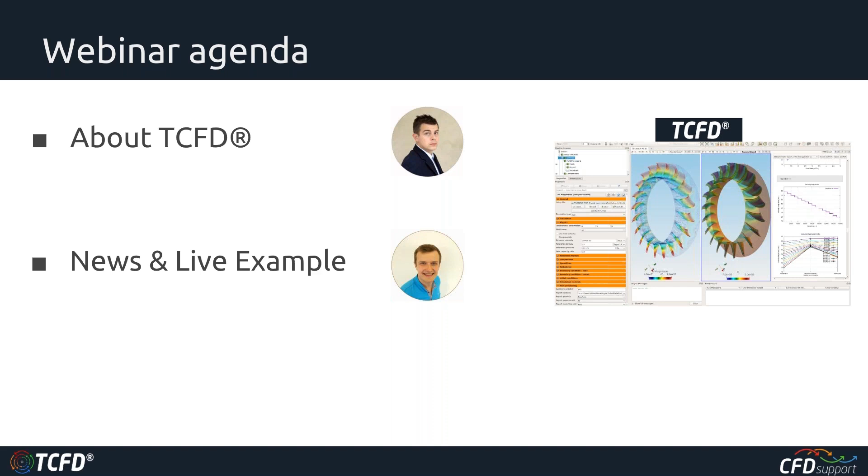Okay, so this is the webinar agenda. The webinar is going to take about 1 hour. There will be 3 parts. In the first part, there will be a general introduction, which is this one, where I'm going to point out the main TCFD features and capabilities. In the second part, Radek is going to give you a live TCFD experience, presenting it on a fan simulation workflow. Finally, in the last part, there will be a Q&A session dedicated to your questions and our answers.

TCFD is a unique CFD software because it's unlimited, which means our clients can keep TCFD forever. They can use it for an unlimited number of users, jobs, or cores. This gives the investment in TCFD a permanent value, and also means our clients can scale their CFD simulations in a really, really big way.

TCFD is focused on particular workflows. For example, a fan engineer uses fan inputs, fan names, fan units, and fan results, as you can see later in this webinar.

TCFD is automated, so for this reason, the TCFD workflow is extremely effective, and also the automation reduces the chance of human error, which is also very important.

TCFD has very good technical support. We keep a custom approach to every customer, to every issue. We never leave behind any of our clients. We are flexible, and we support our clients even in matters outside the CFD field, for example in numerical mathematics, physics, IT, or even software engineering.

Real tutorials are available. Currently there are 22 tutorials that are based on real machines and real projects we solved in the past, so the new TCFD user has no doubts about how to start and even what the best practice settings are.

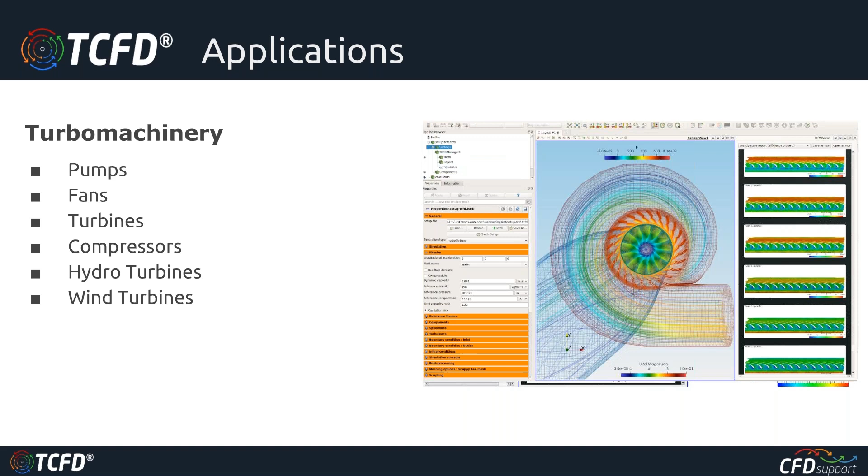TCFD is always focused on particular workflows by particular applications. TCFD's core has always been turbo machinery simulations like pumps, fans, turbines, compressors, hydro turbines, or wind turbines, and many other kinds of turbo machinery, both radial and axial machines, both compressible and incompressible fluid flows.

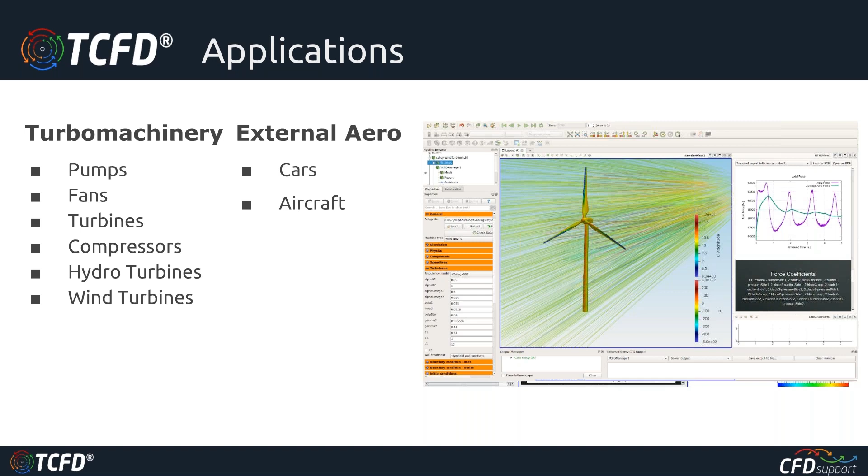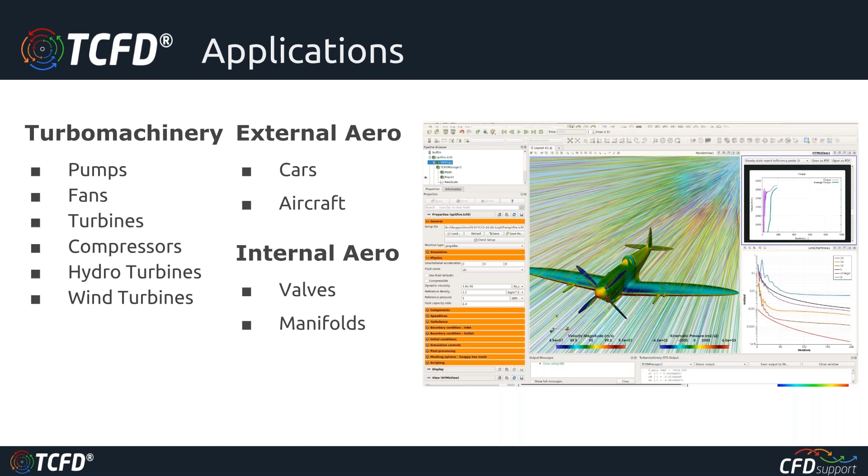Later, we decided to extend what had worked so well in the turbo machinery field to external aerodynamics. So now TCFD is able to simulate cars, aircraft, or other external flow. It can also simulate internal flows like valves, piping systems, manifolds, and many others, or for example ship hydrodynamics.

So the usage of TCFD is very wide now. These are the applications.

There are a few technical details, I will go very quickly over them. TCFD is natively compiled for Windows and for Linux. It's up to the user which workflow is used - they are exactly the same.

100% of the workflow is in the graphical interface. Batch mode is available, so TCFD can be run by another software in the background. TCFD is further scriptable in Python. What's important, the automated meshing system is included, or external meshes can be loaded.

The trial version is available, so anybody can try TCFD, and after trying it, decide whether to go for it or not. It's very transparent for this reason. Real tutorials are included.

TCFD has strong post-processing, with a special reporting system in HTML format. We have also developed a special set of tools for turbo machinery post-processing. There's extensive documentation available - PDF manual, videos, how to work with TCFD. Many of the resources are available online.

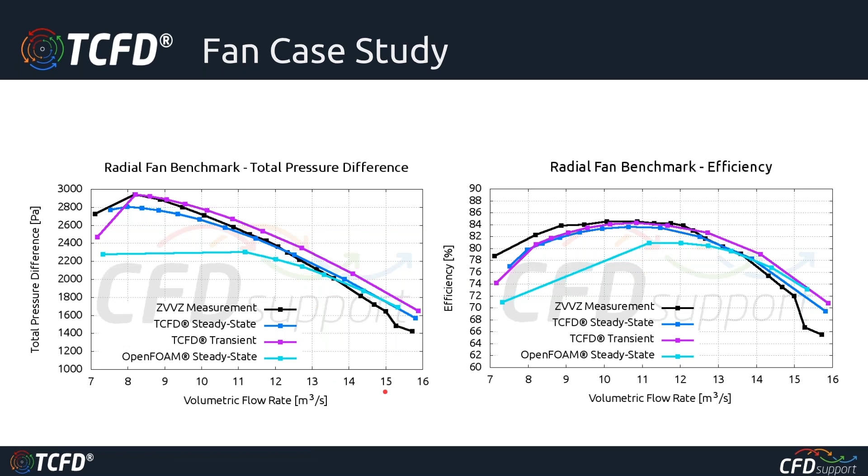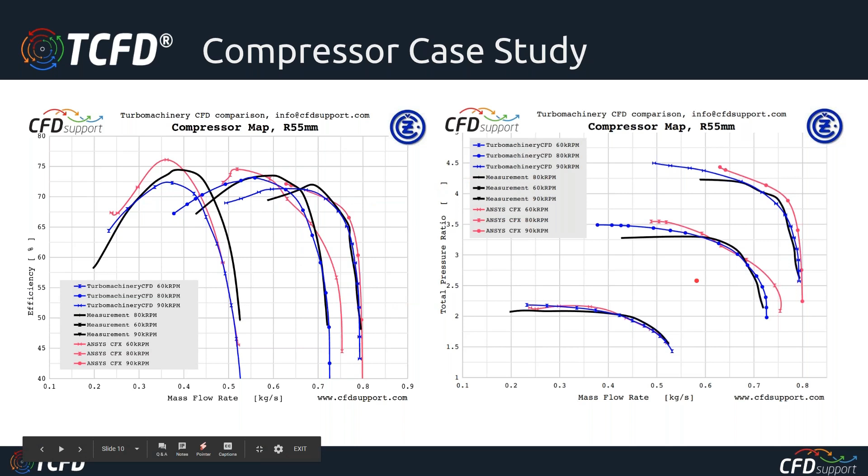In another project we did together with ČZ Strakonice, the project was aimed at compressible flow of a centrifugal compressor. Again, measurement data is available, and we also have one commercial code's results to compare with. Complete centrifugal compressor characteristics were simulated at 3 compressor speeds, and as you can see, the results are also in good agreement.

This one is a detailed study we made on TCFD parallel scaling. As you know, scalability is one of the most important features of any CFD code. In modern CFD, it's critical for any CFD code to show linear speed up with increasing number of simulation cores. Especially for unlimited CFD code like TCFD, scalability is crucial. So we made a detailed study on TCFD parallel scaling.

The tested case was a Francis turbine. The scaling results are amazing - here you can see the key figures. This study clearly proves that TCFD has very high parallel scaling efficiency. And of course, the detailed PDF paper is available for this study, so feel free to ask for it to have a look at the details.

TCFD is being extended by new applications. Recently we made TCFD able to simulate external aerodynamics. We made a complex TCFD study on a Spitfire aircraft, using the CAD model and original measurement data to compare with the simulation results. The agreement with the measurement was excellent.

The detailed paper of the study is available, so feel free to ask for it.

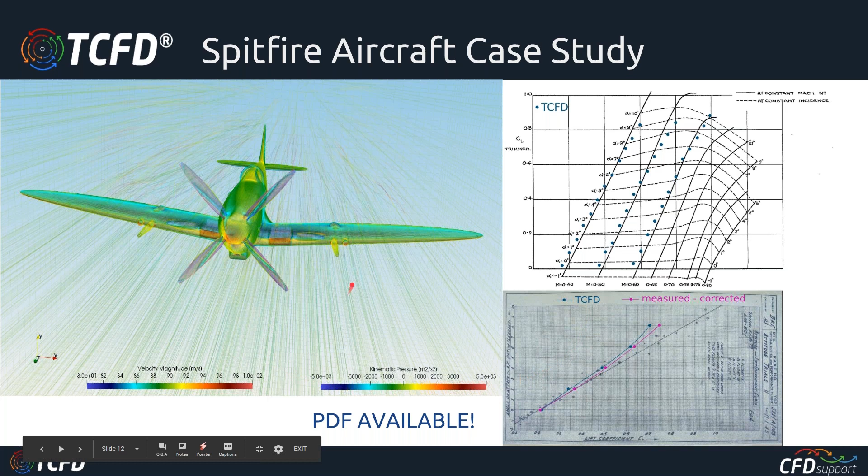In my last example, we have an optimization study. We did this together with our partner, a German company called Friendship Systems, who developed their product called CAESES, a flexible CAD platform for fast and comprehensive design studies combined with simulation tools. Together we made this study on fan optimization.

The optimization study is a cycle of many simulations of many designs. The designs were created in CAESES and simulated in TCFD, and as a result the engineer gets an optimized fan model with higher efficiency. The detailed paper of this study is also available on request.

Okay, I think this is it from my introduction part. Now it's time to hand over the presentation to Radek, and he will give you a live experience of the TCFD workflow.

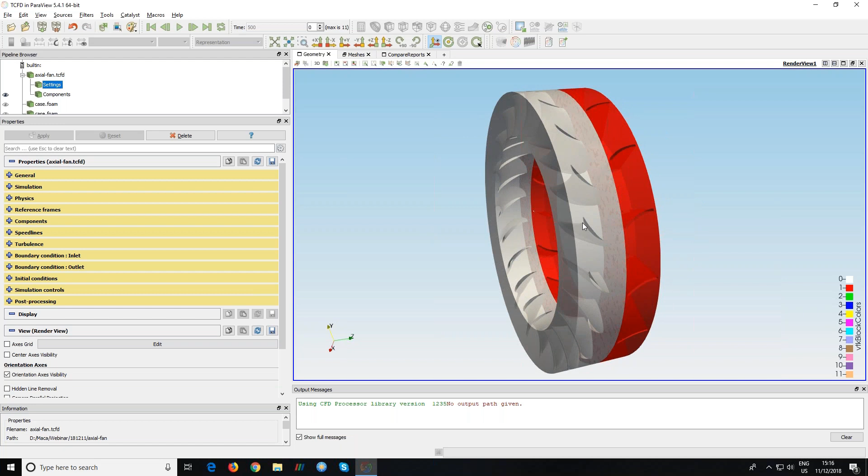Then we will show you the difference in setting up the same case but only with the segment approach, where only one blade segment is simulated. Then I have an example of a radial fan, showing how the setup is done, and some results or comparison studies for this particular geometry.

Last but not least, the latest version, 18.10, of TCFD allows defining several rotors with different axes of rotation and different speeds. I will show you how to set that up as well.

Okay, let's start. All these cases are our tutorial cases, so you can download them and try them yourself. You can ask for the trial version, download the tutorial, for example for this double rotor fan, from the download section, and try it yourself.

So let's start with what we need at the beginning to work with TCFD. For example, I've prepared an axial fan segment live example. At the beginning we need to have the geometry in STL format. Usually we need each component, which is a given part of your geometry—stator, rotor, pipes, and so on—well defined and exported from your CAD software into STL format, which can then be used for the TCFD setup.

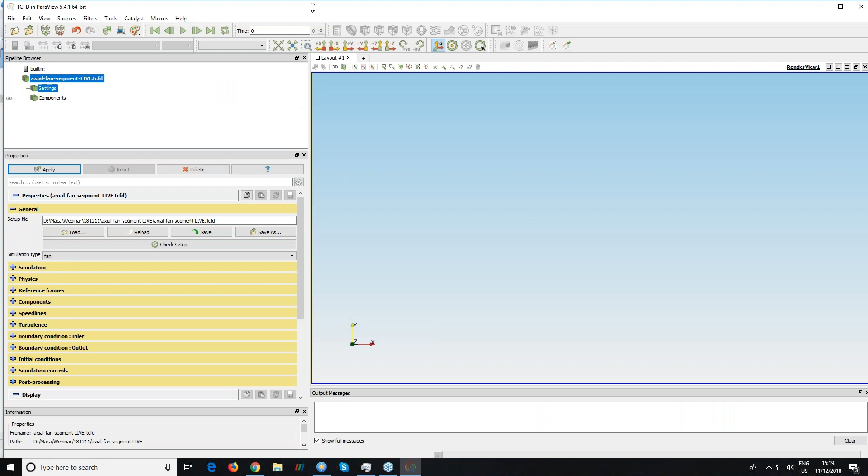What I haven't mentioned: I am in Windows, but the same workflow can be applied also in Linux systems. By clicking on the TCFD file or opening TCFD, you will see this graphical user interface, which is directly implemented into ParaView, a great tool for scientific data visualization. The connection between the setup of the TCFD simulation and the post-processing which ParaView provides is amazing because you can do anything in one place.

Or if you already have the simulation set up and you are, for example, ready for an optimization loop or any other loop, you can go directly to this preset case. You can simply open the command line, and with a simple command, here—I will just follow the TCFD installation—this is the binary, and there is the execution file CFD processor, which works very simply: you just give it the setup file and tell it what's to be done.

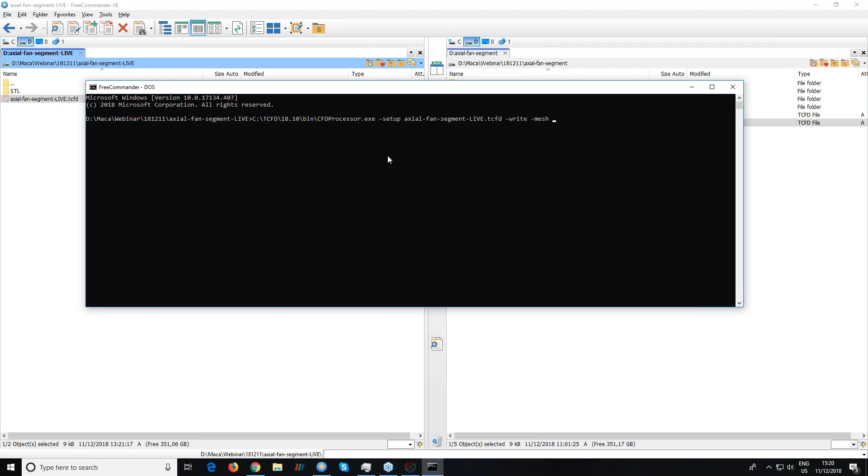For example, I would like to write the case and create a mesh, and additionally I can set where to store my simulation, for example my directory. Just click, just enter—you can put this into your script or scripting loop, and anything can be done without a graphical user interface.

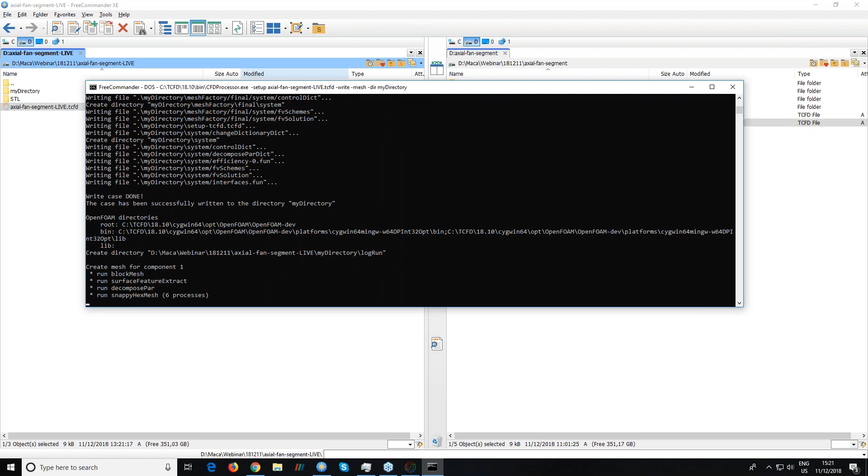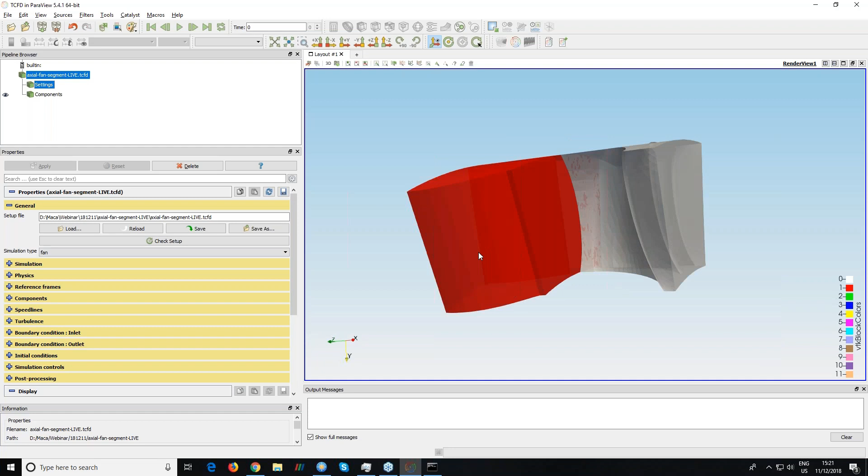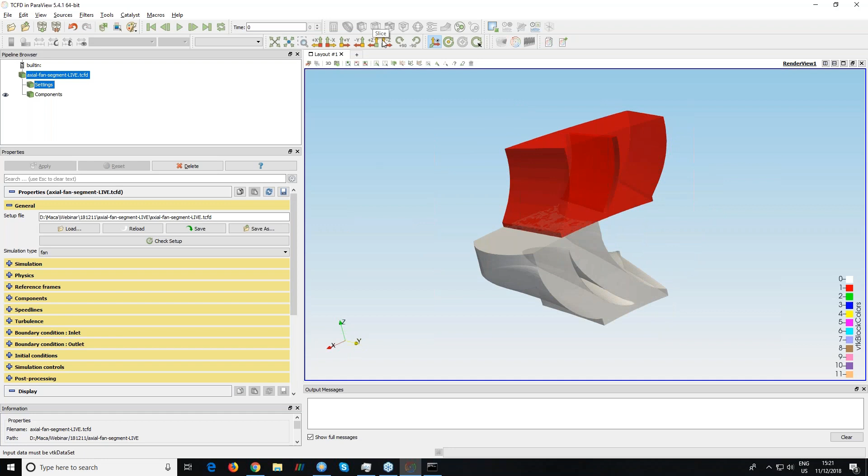Okay, but now because I will be talking about the setup, it is much more clever to use the graphical user interface. So this is how it looks like. Here are the several menus for the TCFD setup. On the right side, we have the render view in which both input geometry, mesh when generated, and also the results can be visualized. Then there are several icons relevant for TCFD setup, and others for viewing options and applications to the geometry, to the results, and so on. I think it is quite intuitive, and it takes just several minutes to learn the interface.

Okay, so let's start with the TCFD setup. Usually you should go step by step over each menu and define the simulation. So in the first menu, simulation type, it is distinguished by different types of turbomachinery or external aero, because each type consists of a particular setup tailored just for that type, as well as the evaluation or post-processing tools, which are also tailored to the particular case, including efficiency evaluation and so on.

So this is here. Inside the simulation, time management, you can go for either steady state or transient simulations. Of course, you can set any number of processors which you have, there are no limitations. Numerical order first and second - the rule of thumb is that with your first case, your first geometry, you should always go for the first numerical order. When everything goes well, then you can switch to second order. It's always problem dependent, so there's no common setup, but usually start first and then go for second.

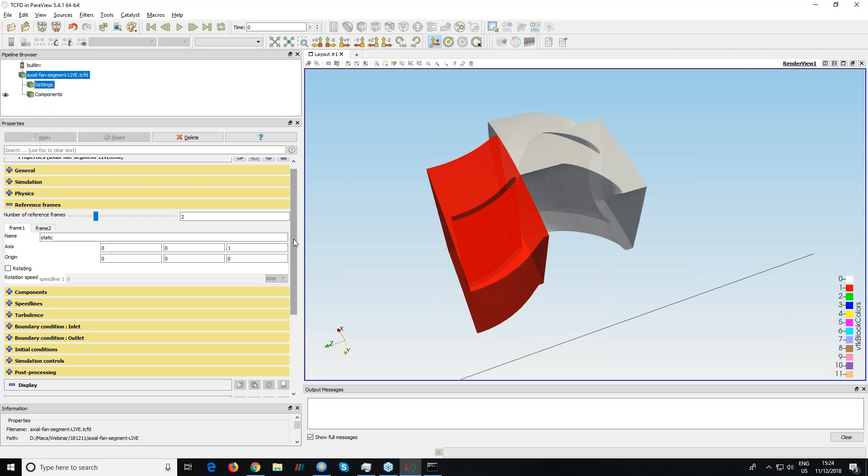Now, what is new in this version is the reference frames framework, which allows us to define several rotors. So for example, in this case, we have just two parts, two segments. I think the flow goes from left to right here. This is the rotor part, and this is the stator part.

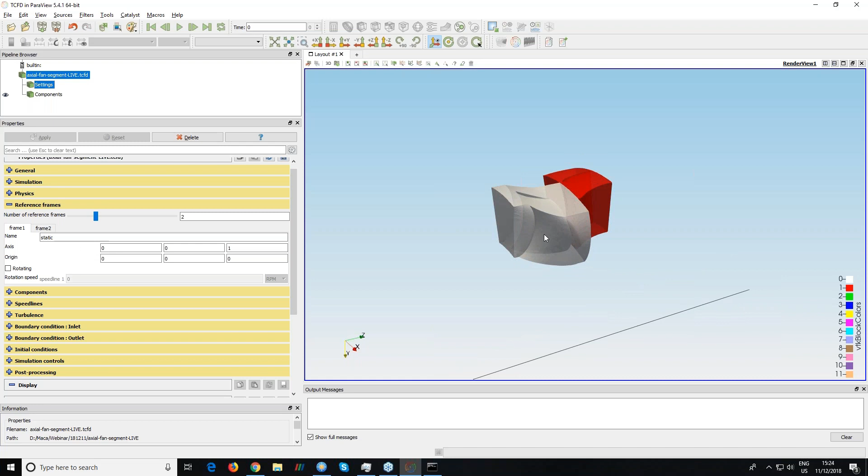So I should define two frames. First one is static, to define the static frame, the stator part. It is not rotating, so no rotation speed is set, but the axis and origin of the rotational motion has to be set, because the solver needs to know the transformation to connect the segment parts, to virtually build a full wheel geometry. And the same for the second frame, which is rotating.

So the name is up to you, you can define any name you want. And if you enable rotating, then you have to set the speed of rotation of your rotor part. If I, for example, move

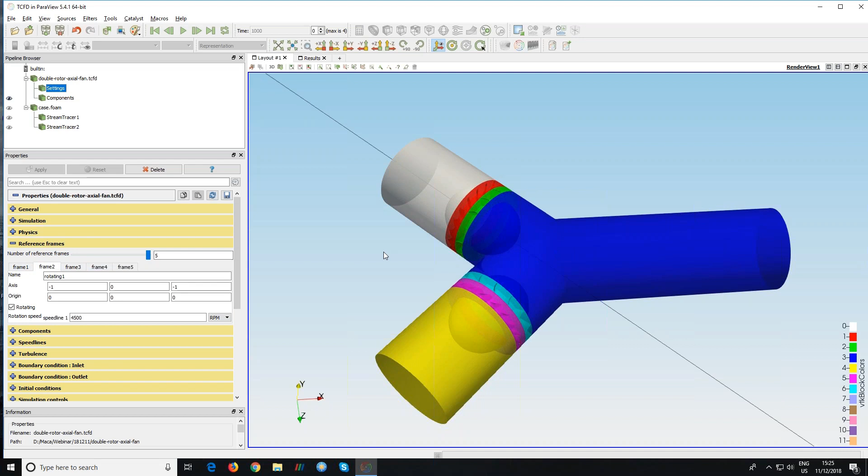to this double rotor fan, then you should define several frames. For example, frame 2 is for rotating this rotor part, and rotating 4, I guess, yes, is for rotating this purple part. You can see also that the axis of rotation is nicely visualized. So if you make some mistake, you will always be informed that something is wrong, which is also a nice feature. Then the rest is almost the same - you define as many reference frames as you need.

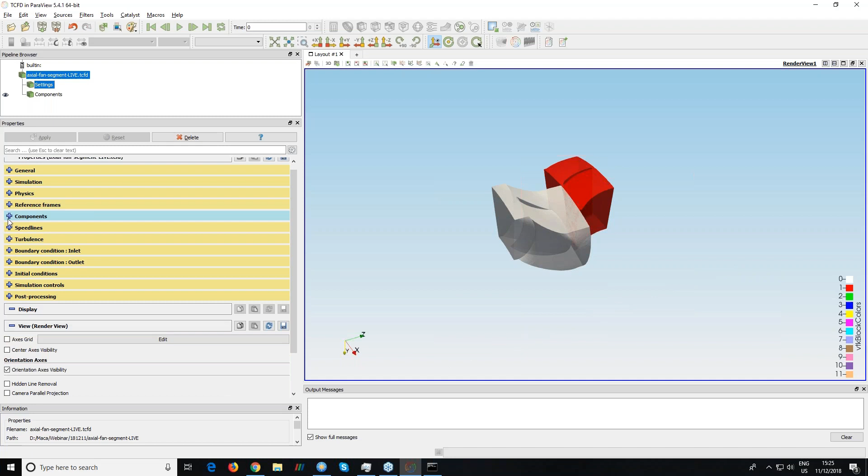Let's go back. And then we can go for the components menu. Basically here you define the mesh, the input geometry, and possibly the mesh for the simulation. There are several options how to create the mesh. First one is to load the STL files, define the refinement, define the fineness of the mesh, and create the mesh by the snappyHexMesh tool, meshing tool. Or you can directly go for external Fluent mesh, and load the external mesh in Fluent format.

So for those who are familiar with some external meshing software, you can go for that. But now I've switched, so I should go back to the directory with STLs. I need to load the case again, because when I switch to the external Fluent mesh, I have erased my setup. So there are two options: STLs or external Fluent mesh.

Then you can define here the component name to be more clear which component it is, so you can then know from the report and any other setup that you are at the impeller or at the stator or any other part.

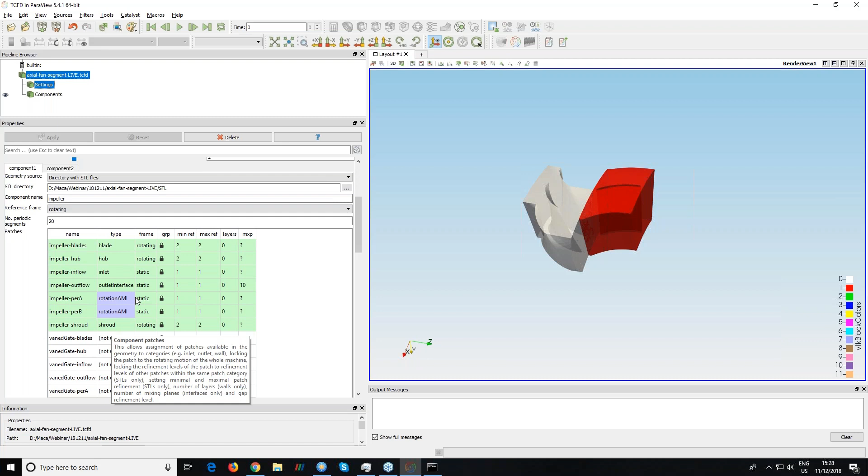For example, if I go for the full wheel and look at the components, you can see there are no connections because we have a full wheel, so there are no periodicities to be connected. As you can see, the other setup is the same.

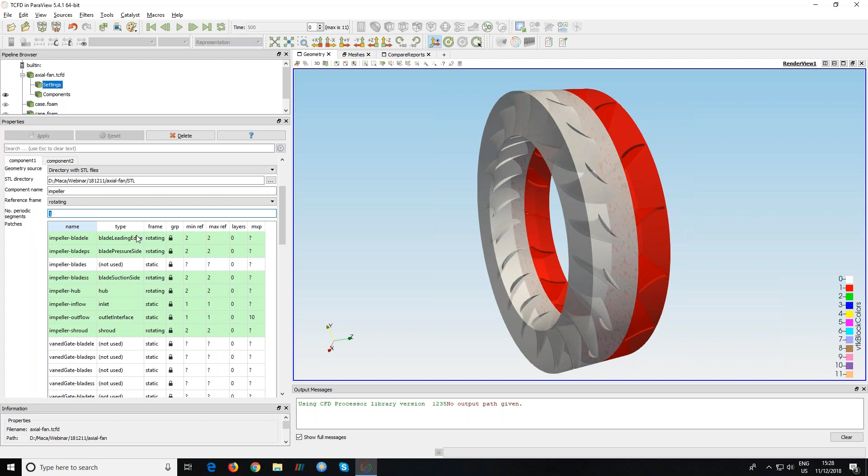What I missed is the number of periodic segments. For the full wheel, we have just one because we have the full wheel geometry. But if we have only one segment, then you should set the number of blades which builds the full wheel. In this case, we have 20 blades on the rotor side.

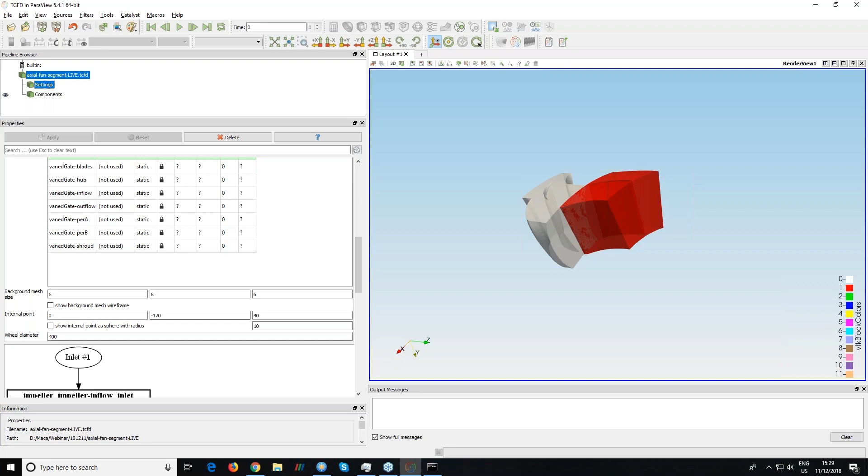Then we should define the refinement of the mesh. First, we have to set the background mesh size, which is basically the largest cell inside your mesh. To see how these cells are sized compared to your input geometry, you can enable 'show background mesh wireframe', and then you can see how rough or how fine it will be.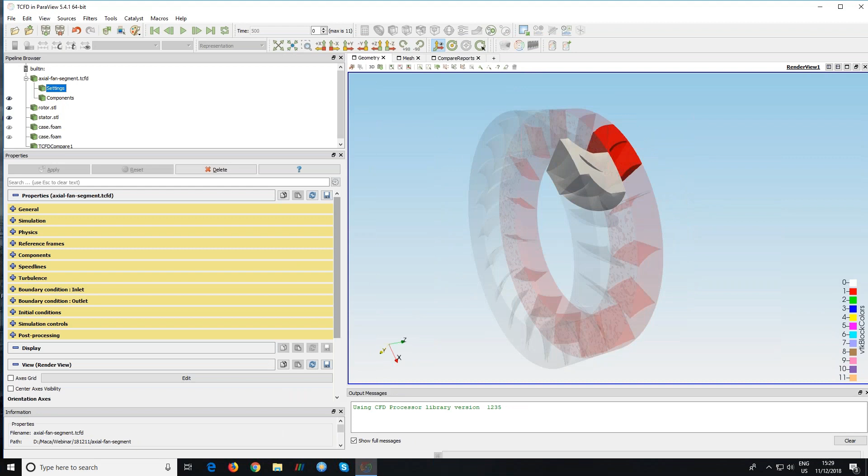This case is set up to be quickly computed, so I set quite a rough mesh. If I go, for example, for this preset case, the situation is very similar, but if I show the background mesh size, you can see it's more fine. What is also nice, and will be one of my examples...

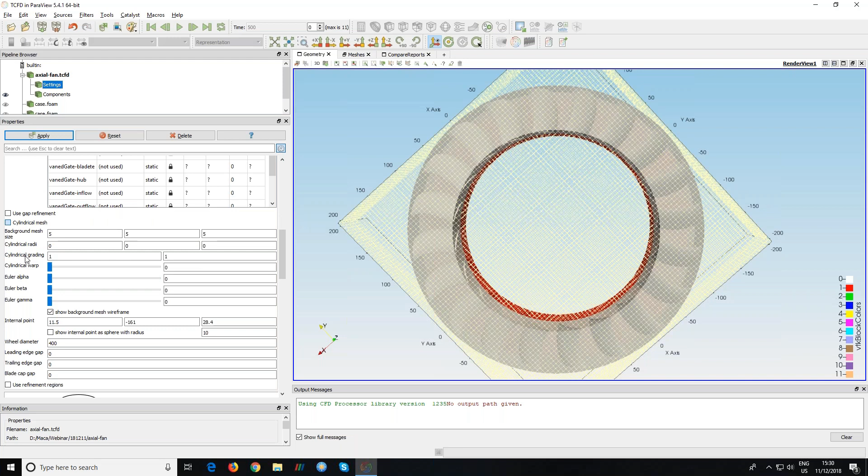There is a setup which allows you to define a cylindrical background mesh. What is the background mesh? It is the initial mesh from which the final mesh is created, roughly speaking. There is a cylindrical mesh option in which you can define this cylindrical background mesh.

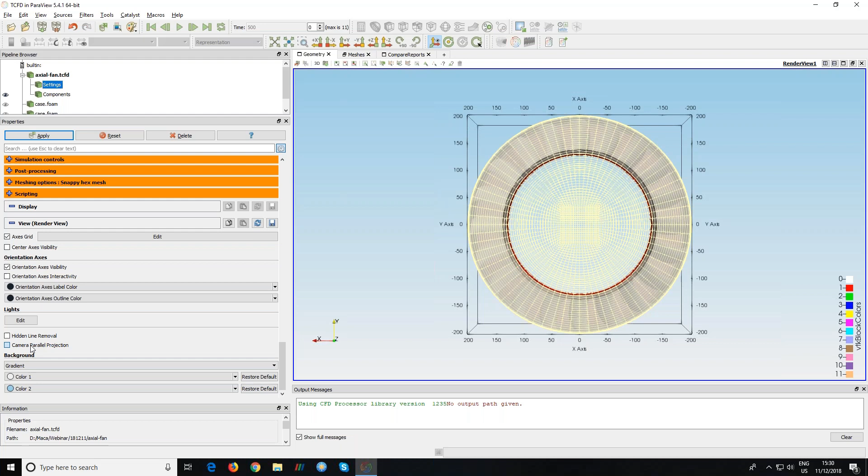For example, I can set a little bit finer mesh. This cylindrical setup already defines the topology of your mesh. I will go, for example, for this view. This is nice. Then I can enable parallel projection, which aligns the background mesh with my geometry to be more visible.

So we can see it. For example, here I can make the background mesh a little bit darker to be much more visible. Now what I would like to show you is that the cylindrical radii define the topology.

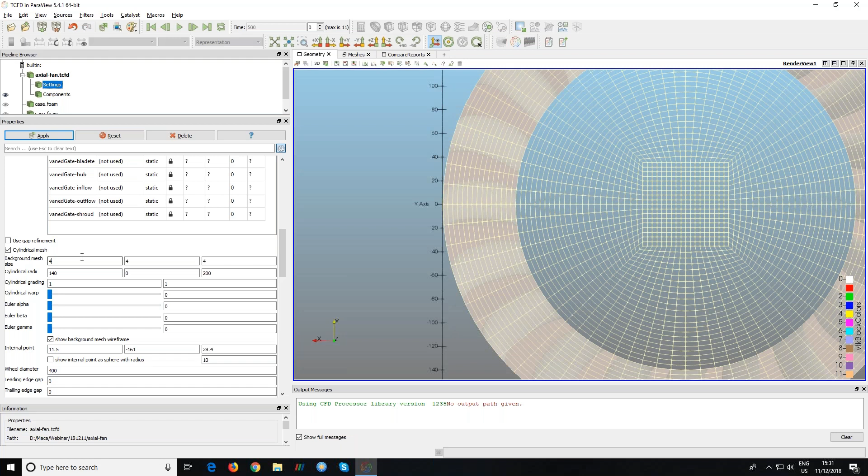For example, I know that the radius of the impeller is 200 millimeters in this case. So I aligned this with the shroud. Then this cylindrical radii I will align with the hub, which is 140. Okay, this is this, and this I will put in the middle.

Then for this cylindrical grading, okay, first I will start with cylindrical warp. You can see that the topology inside goes to the circular shape. To, for example, enable some boundary layer at the hub and shroud from the background mesh directly...

I can go for this grading. For example, I will set here 5, and the inverse value on the other side, on the shroud, and you can nicely see now that we have something like the boundary layer.

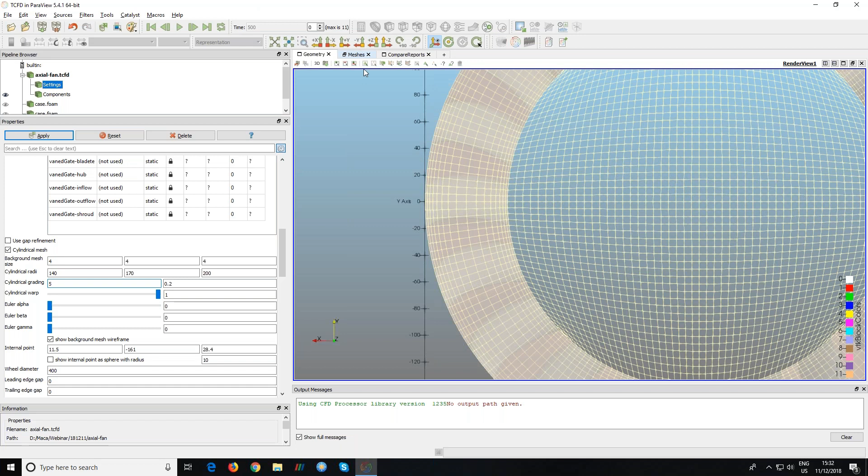And for this, I can then create the mesh. So I have some examples here prepared in advance. I will show the background mesh off. We can see this is, for example, the final mesh created from the hexahedral shape, and this one is from the cylindrical shape. We can see obvious differences and so on.

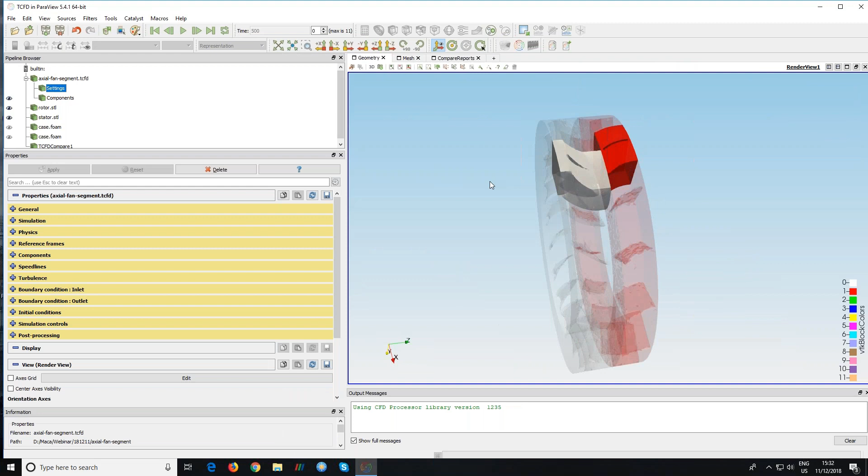We can do the same just for the segment in the same way. You can see this is a segment mesh created from the hexahedral shape, and this one is created from the cylindrical shape. At the end, we can compare the results of these different meshes and show what the differences are. But let's move on.

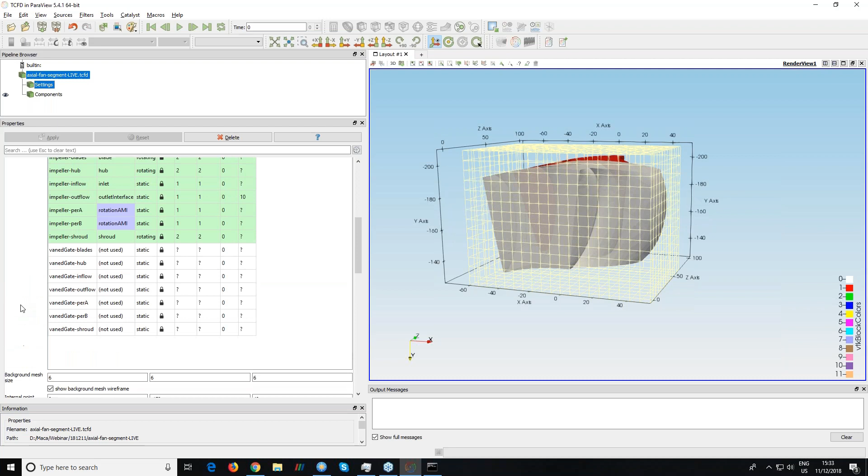Let's move on. So these are the components. I think I didn't forget anything, I hope. Yeah, maybe here the wheel diameter, which is the compulsory parameter for the efficiency evaluation for the fans. So you also have to define this parameter, the wheel diameter.

Let's go on. So after components, we have the speed lines. What does speed line stand for? A speed line is a group of simulations which hold the same rotation speed. For each speed line, for one rotation speed, we can define several points to be simulated, usually with different flow conditions, different pressure drop or volumetric flow rate, for generating the full performance curve.

For example, for compressors, we can define several speed lines with several points, and then within one simulation we have the full performance map. So speed lines and number of points. Here we define the maximum number of iterations for each point.

Then there is a turbulence model, so K-omega SST, but you can go for your favorite, or the one which you have the best experience with for your particular case or project.

Then the inlet and outlet boundary conditions. Here you define the flow conditions. In this case, it is treated as volumetric flow rate at the inlet and static pressure at the outlet, the kinematic pressure, because we are simulating it as incompressible.

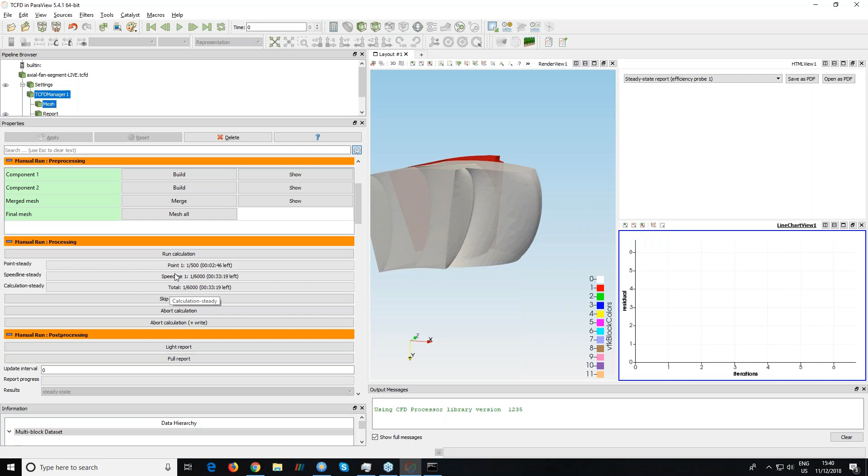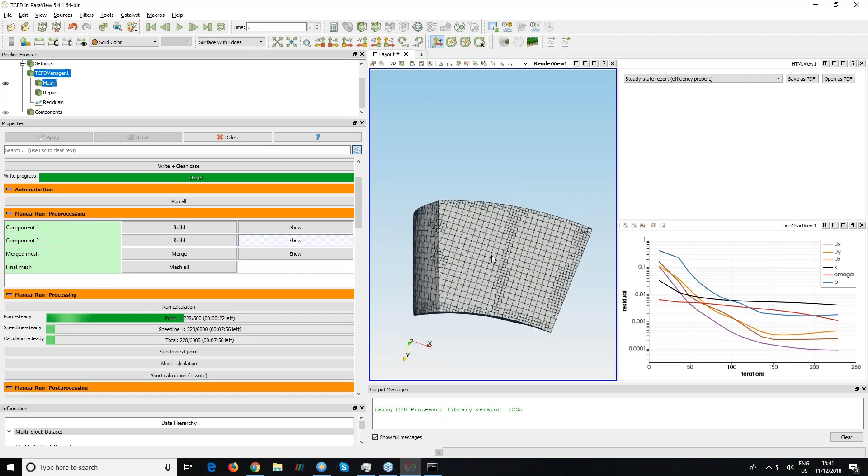During the simulation, you can follow, for example, the residuals. Meanwhile, you can visualize the mesh, so you can click here, show, and I will hide the components part, and basically follow the mesh. It's quite rough for this particular case, but it's totally up to you how fine you define it.

At the end of the simulation, I will close it or keep it, but at the end the report is automatically generated, so I will show you the report. So this is my case.

I will go for some already simulated one, for example this axial fan simulation full wheel, and here you can anytime open the report, which is stored in this place, and will automatically appear in the graphical user interface whenever the simulation is done. So then here you will see the report.

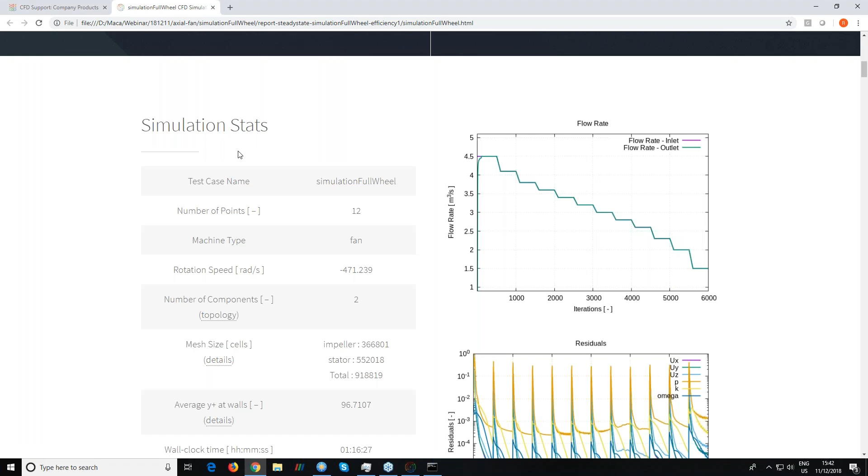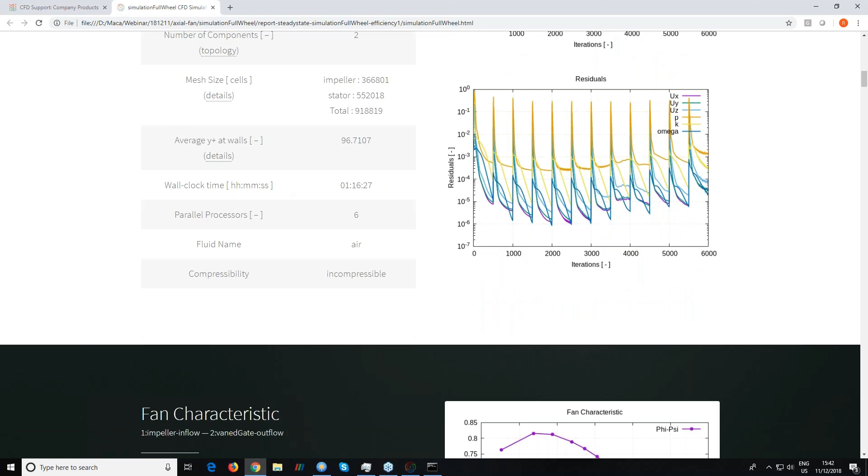But now I will open it in this way, so you can see a screenshot of your geometry, then the basic simulation statistics, for example rotation speeds, mesh statistics, y plus parameter, number of processors used for this simulation, and time of the simulation.

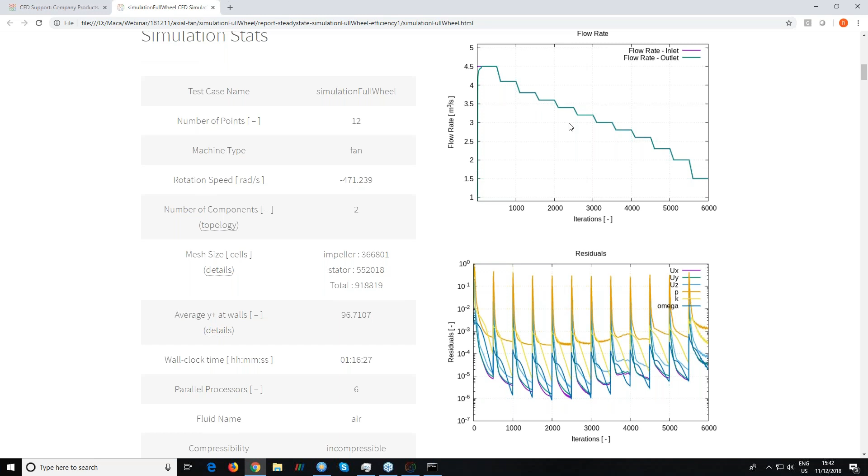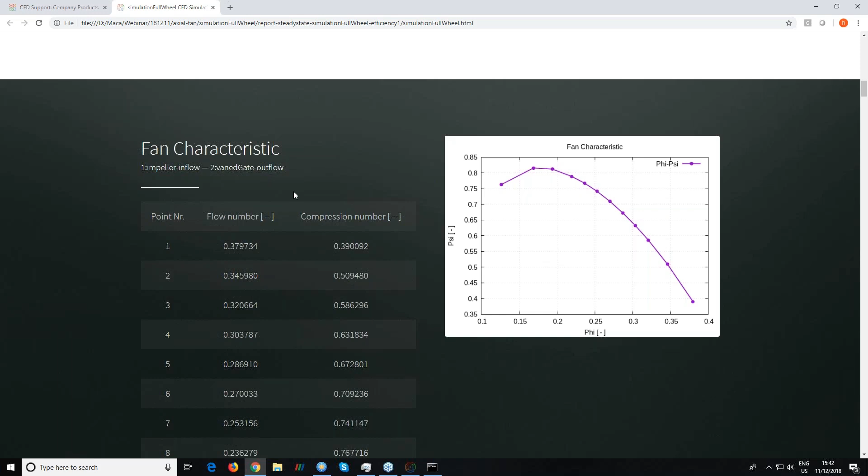Here in the graphs, you can see the process of simulation, both in volumetric flow rates and the residuals. And then the report includes several sections with a particular parameter which is evaluated, for example fan characteristic, so flow number versus compression number, efficiency.

Here I have put some previous data. For example, these blue ones, this blue graph, are the results for the case where only a segment was simulated, and this one is the full wheel.

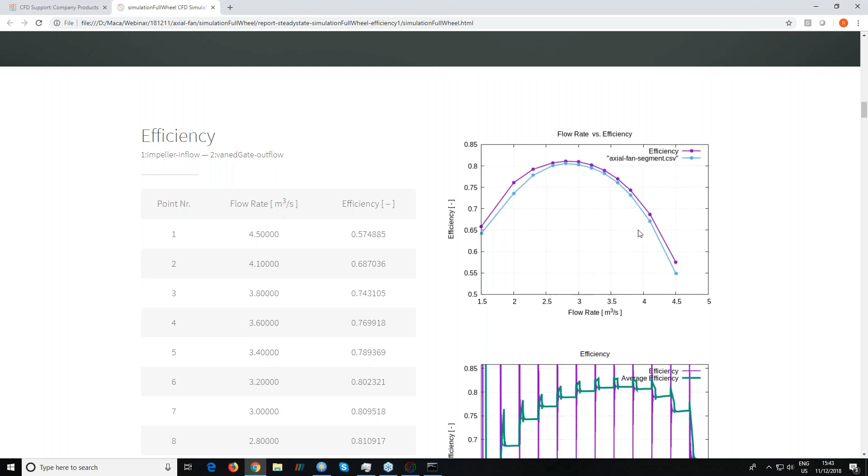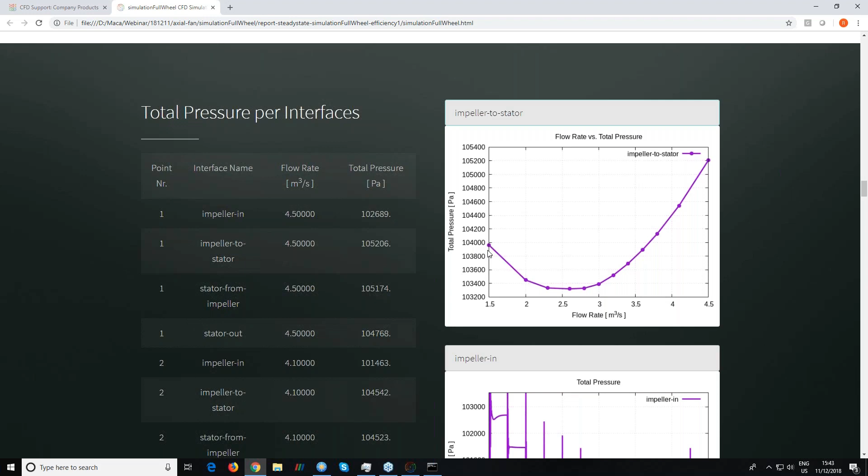The same for torque, for axial force, total pressure difference, total pressure per interfaces. So you can go for interfaces, for example to follow the total pressure at the impeller to stator interface, nicely seeing the values.

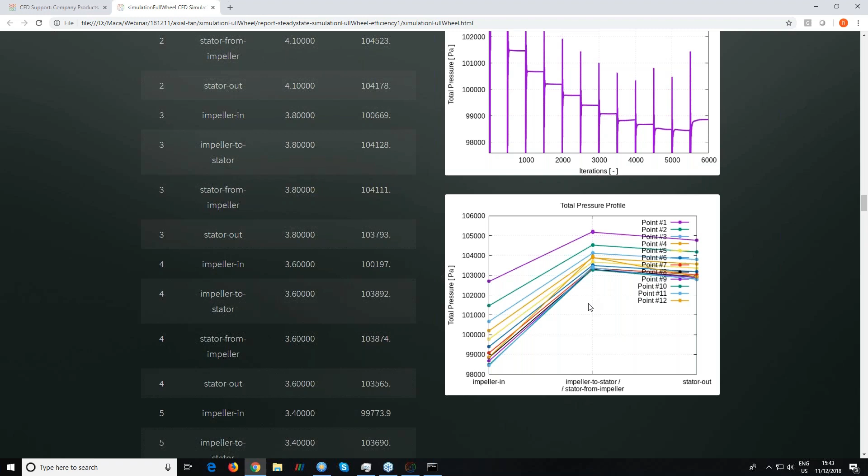Here is the profile plot, showing how the total pressure is changing from the inlet to the outlet, or over each interface. The same for the velocity magnitude, circumferential and meridional angle, and last but not least are these automatically evaluated visualizations, for example blade-to-blade views.

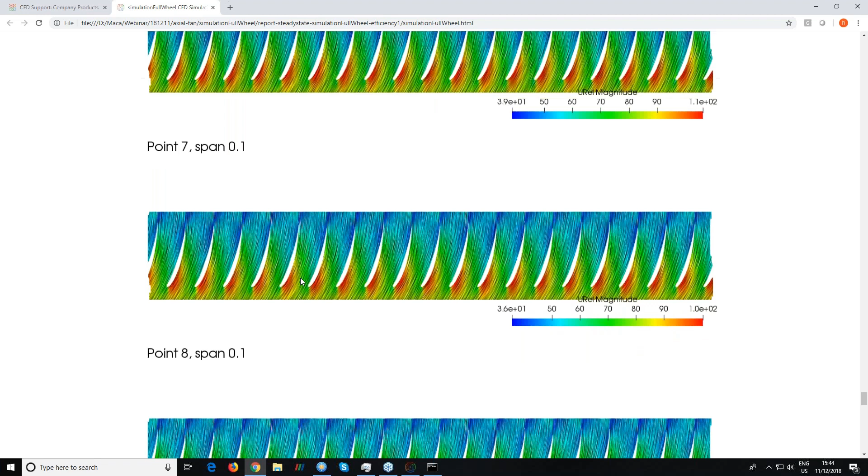So this is the blade-to-blade view with streamlines and velocity magnitude visualization. And I think the last one is the meridional average, so averaged to the meridional plane at the rotor part for each simulated point. Okay, so this is the report.

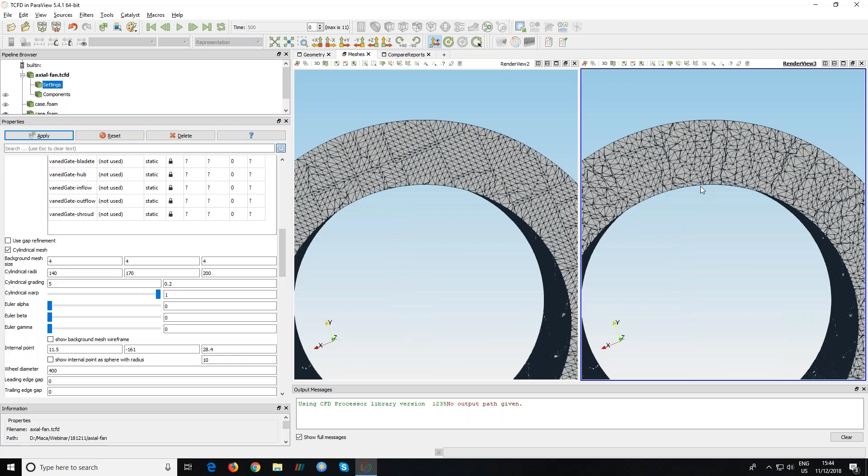Then I promised you some comparisons. For example, what I have run in advance are four cases for this axial fan: two cases for the full wheel geometry, one with the hexahedral background mesh, one with the cylindrical background mesh, and the same for the segment part.

Then, for example, you can compare these two simulations. So I can show you here the report - this is the comparison of simulation of the segment and simulation of the segment with the cylindrical mesh. You can nicely compare, for example, the number of cells, simulation time, and so on.

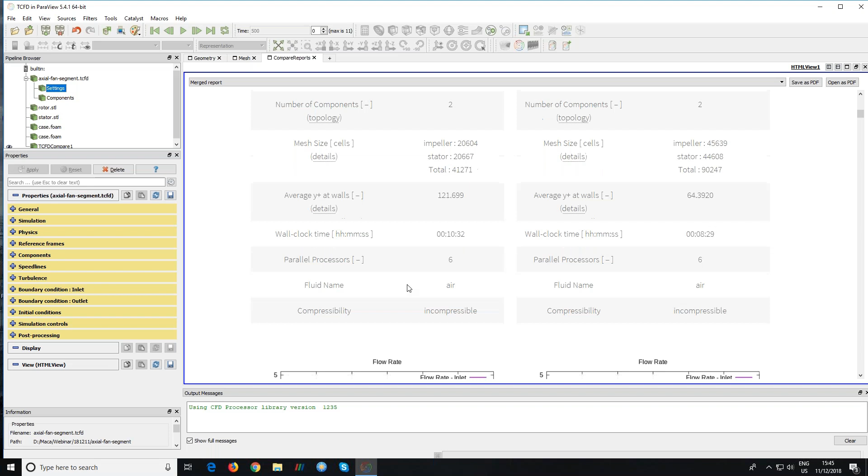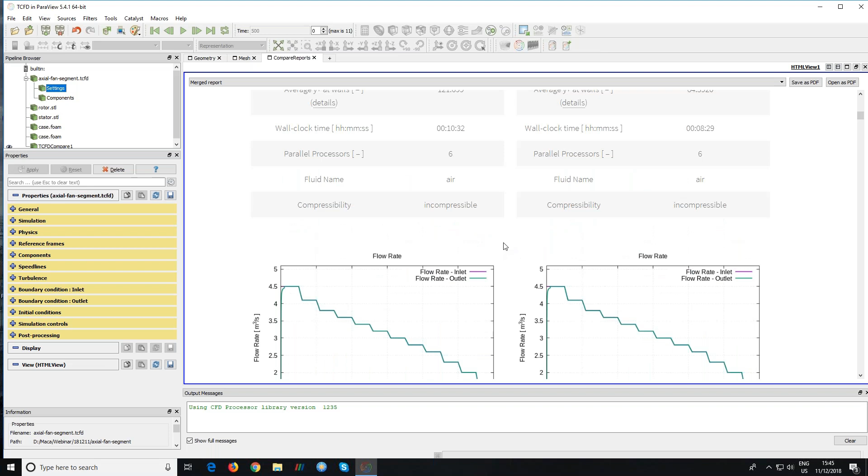This comparison report can be nicely and simply generated by this TCFD compare option, which is very intuitive. You can just click on it, load the HTML files of the wanted reports to be compared, and that's all. So you can compare, for example, residuals, and what we can follow is the flow rate versus efficiency - you can see the difference between those types of meshes.

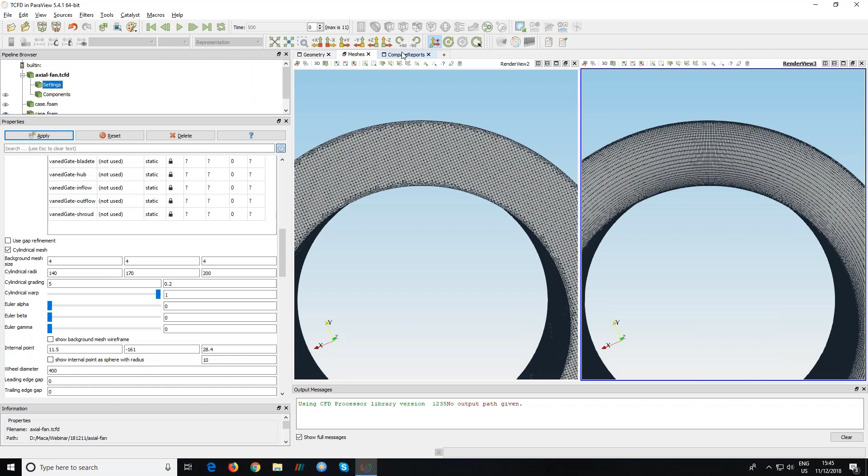The same, for example, you can do for the full wheel geometry - the same compare reports. Again we can go directly for the efficiency graph, for example. By clicking on it, you can make it larger and compare the result. For example, you can see that here the differences are much lower than for the segment parts.

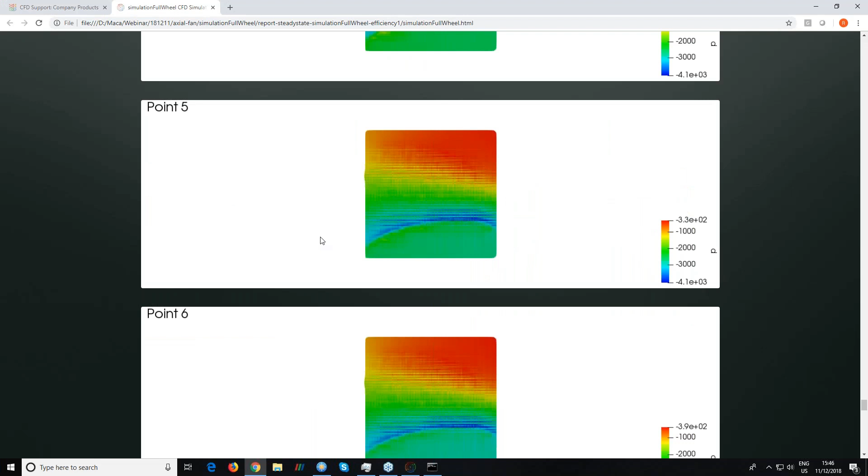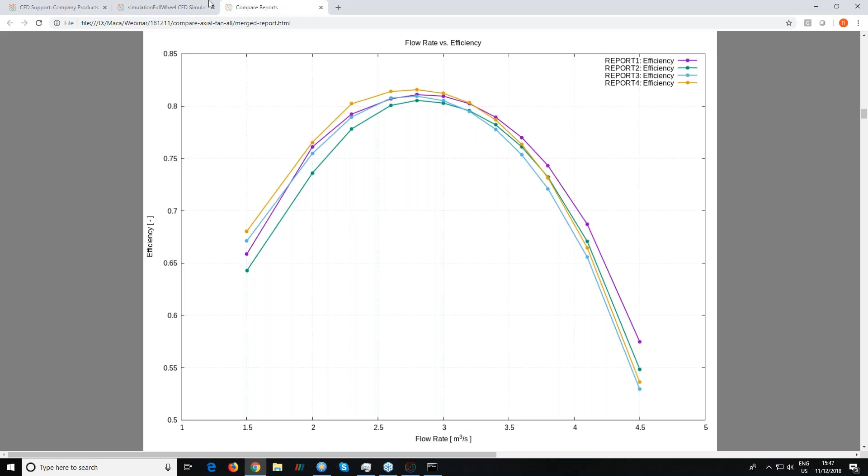And last but not least, I have prepared the compare of all my simulations for this axial fan. So I can open it, and here is basically the comparison of the full geometry, segment geometry, and both types of meshes. Again, go for efficiencies, so you can nicely compare all your simulations, all your setup, and tailor it to your experience. Yeah, so the flexibility is really, really large.

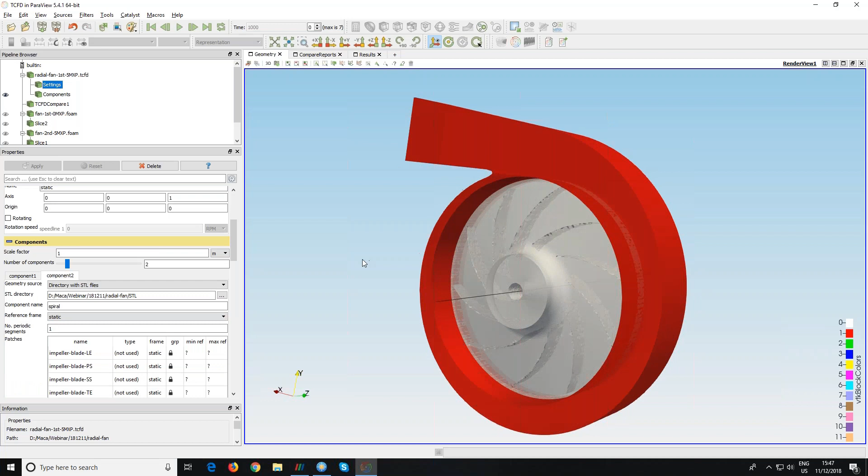Okay, and maybe with this radial fan, for example, you can see that the simulation setup is very much the same - two reference frames and so on. So almost the setup is almost the same. Then you can again run the simulation.

For example, here I have run several simulations with first order, second order, with two methods which I haven't yet mentioned - this MXP column defines basically the method of connecting two components.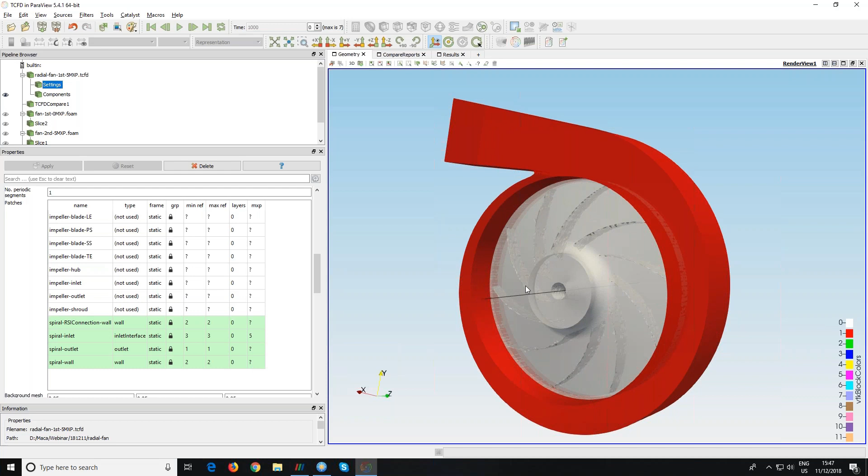So the first one is, if I set 0, then there is a 1-to-1 correspondence, or basically it is the so-called AMI approach or frozen rotor approach. And if you set some positive value, then the mixing plane approach or stage approach is enabled, which are two different approaches, each with their own drawbacks and advantages.

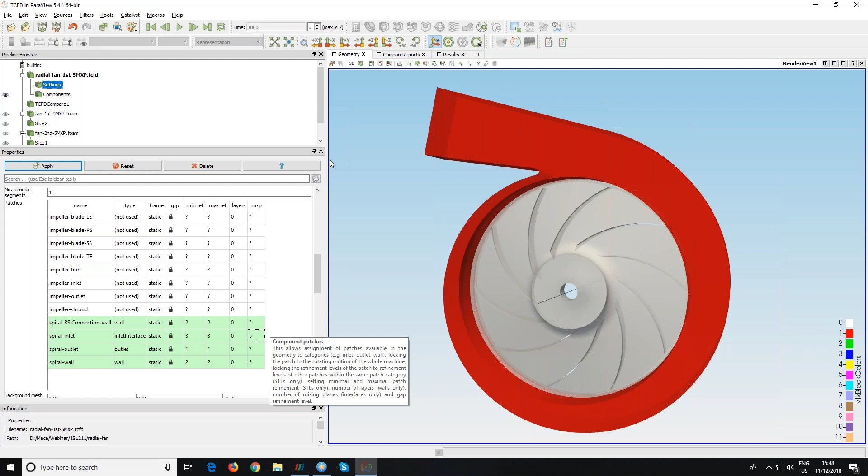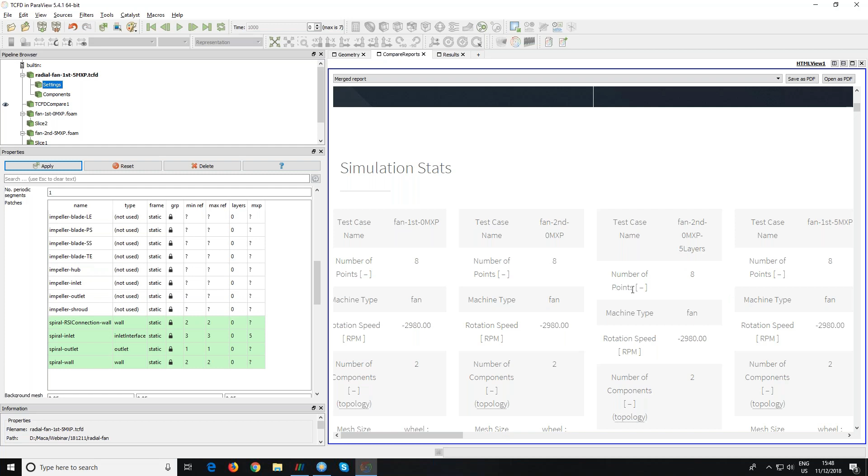What you can do is run several simulations and compare. So I have compared 6 simulations: first numerical order, second numerical order, frozen rotor, stage or mixing plane approach, and mesh with layers and without layers. If we go for the efficiency graph, we can compare.

For example, the purple one is the simulation with the first order frozen rotor. The green one is second order frozen rotor, and the light blue one is second frozen rotor, second order with the boundary layer. The mixing plane or stage method started with the orange one, first order, then second order is the yellow one, and the second order with boundary layers is the dark blue one.

So you can see that each setup influences your result. You need to know which setup is best for your particular design, for your particular project. Although everything is set up with best practice, each case, each project requires some advanced analysis to fit the simulation to the particular case. And this TCFD provides all these tools to make it happen.

Maybe I have also, every visualization can be done directly here. So I have made here the comparison of, for example, the case which has the lowest efficiency and the highest efficiency. And here you can compare it.

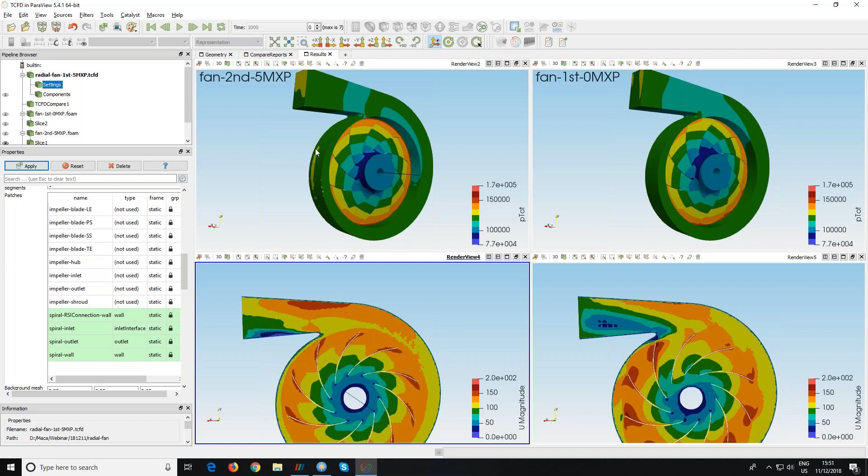So there are many tools for how to do that. TCFD really provides you all that is necessary for a successful project. Okay, and I think I'm at the end.

Okay, so I hope I didn't miss anything. So, Luboš, what do you think? Radek, I think it's perfect. I think we can continue in the presentation.

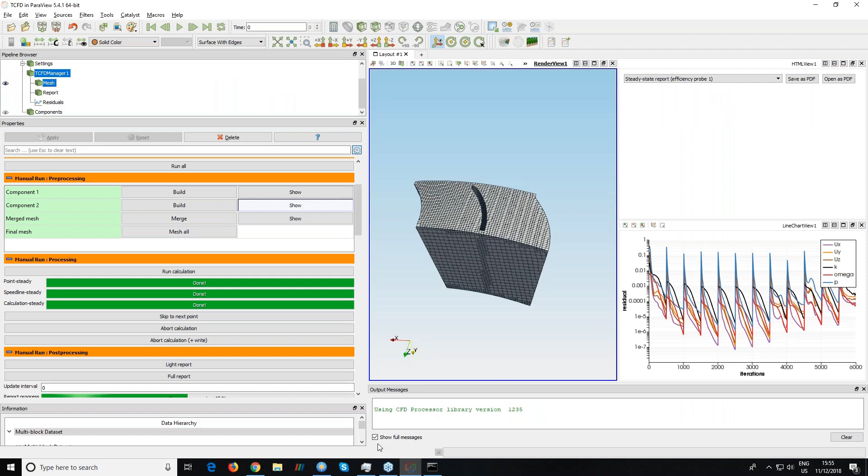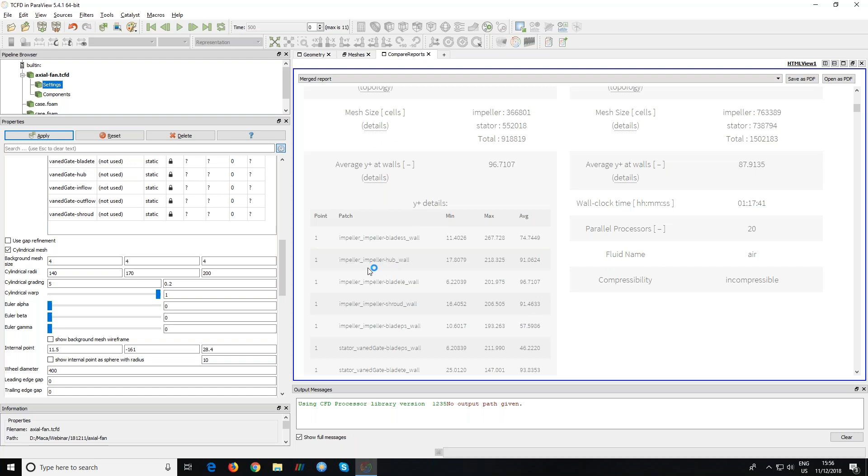Some geometry, which is this one, for example, compare reports. So don't be scared about this value. This particular design has the y plus in the range for which the wall functions are dedicated. And if you go for details, you will see the average values for every part of the geometry, which is much more important, because this value is just the largest value from the whole geometry.

So for example, in the outlet pipe, or inlet pipe, you don't need to have y plus too low, because it's just to initialize the flow, or at the outlet it is just to make the flow more steady for the boundary conditions, which CFD likes — steady state, or steady flow, not so turbulent with many recirculations at the outlet.

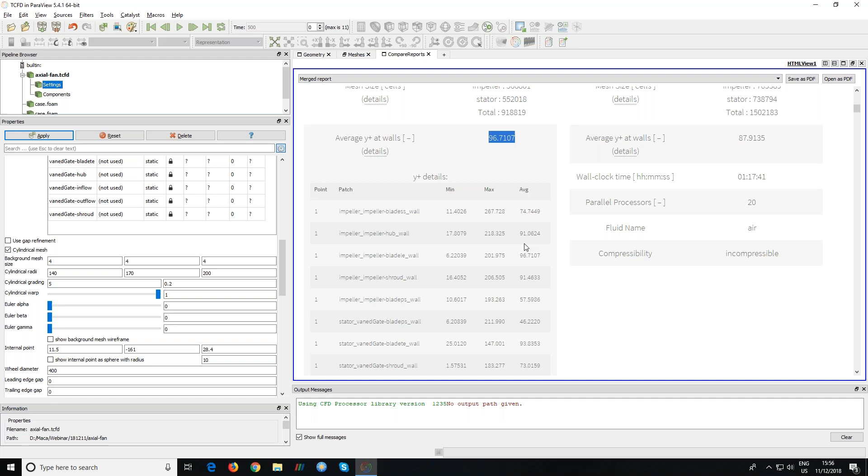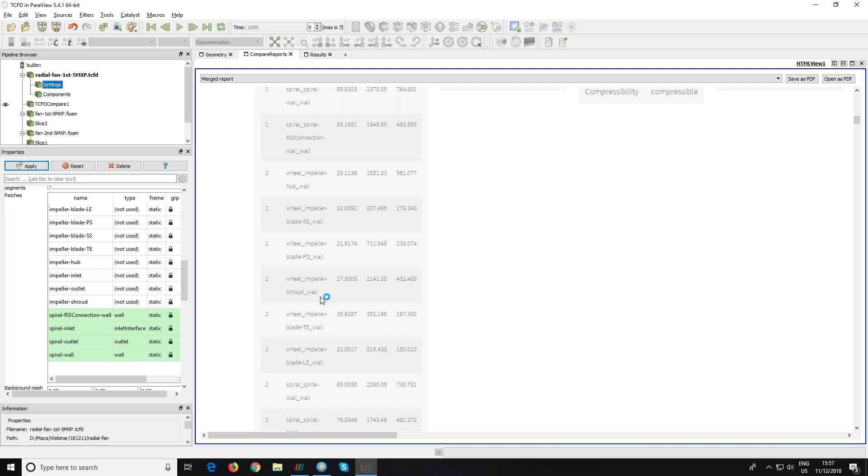So you can go back to the meshing part, mesh these parts to be more refined, or add the boundary layer or whatever. And for example, the case with the boundary layers, I think here, you can see that the y plus are now in the allowable range. So this was the example of how to iterate to get the mesh which follows the needs of the wall function, for example, and other needs.

So click on the details, and then you can go really patch by patch, part by part of your geometry and check if the values are okay. And if not, you can go back to the meshing part, make that part finer, and simulate it again.

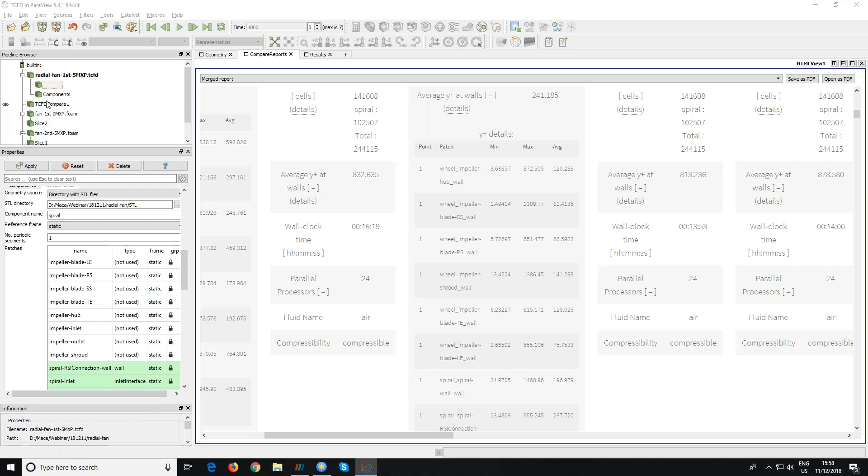Yeah, okay, so I will answer this one, and then we can go back to Luboš. Can cavitation be modeled? What models are supported? Yes, it can be. There is a cavitation model for water turbines and water pumps. If I go here, let's say hydro turbine, it is only available for transient simulation, the full cavitation model. In physics, you can enable this multi-phase cavitation, which is the full cavitation model by Schnerr-Sauer, using the Schnerr-Sauer modeling. So yes, it is available.